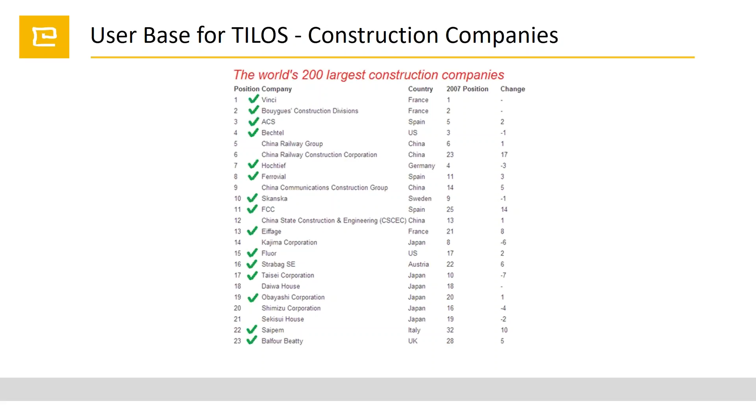As I can see, we have a lot of attendees from India. You have to pay attention that it's also widely used in India by companies such as Ircon, SR, Siemens, Larsen, and so on.

So what are the characteristics of a linear project? Well, the first main characteristic is that all the activities, all the works are performed on the right of way. So we have one axis where all our work should be performed. We can observe them on projects such as pipeline, railway, highway, tunnel, engineering, transmission, and also high-rise building projects. One of the main things to take care of is that we have repetitive works.

Which are going all along the length of the project, and the benefit of using TILOS is that it will help you give exact quantities and optimize productivity rates. Moreover, you'll be able to see your crew movement and avoid clashes, and it will help by reducing the project duration and overall cost.

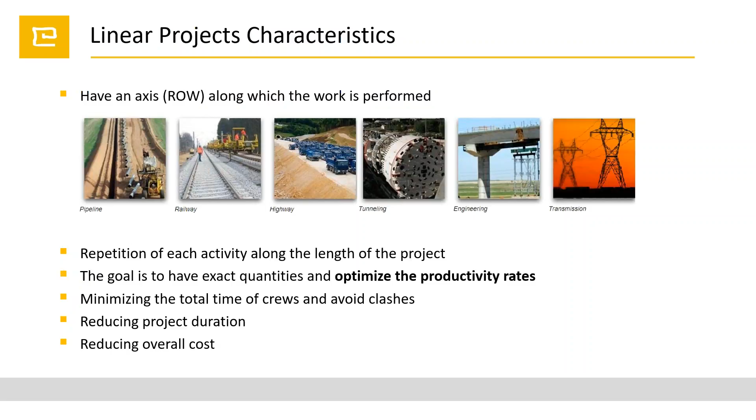So people always ask me at which project stage we can implement TILOS. My answer is that at every stage there is a possibility to use TILOS, whether it's the feasibility studies, the overall plan, the production plan, or special studies. It can be used for pre-designing, planning, procurement, execution, and even for claim analysis.

So it can be used by the owner, engineering companies, the constructor, subcontractors, the general contractor. It doesn't matter, everyone can use TILOS for their purposes.

Here we have some examples of industries where we could implement TILOS. You can see here we have the transmission line project. This is a real project. We would like to show real projects, not just visuals, so that you can see companies actually using TILOS for their needs.

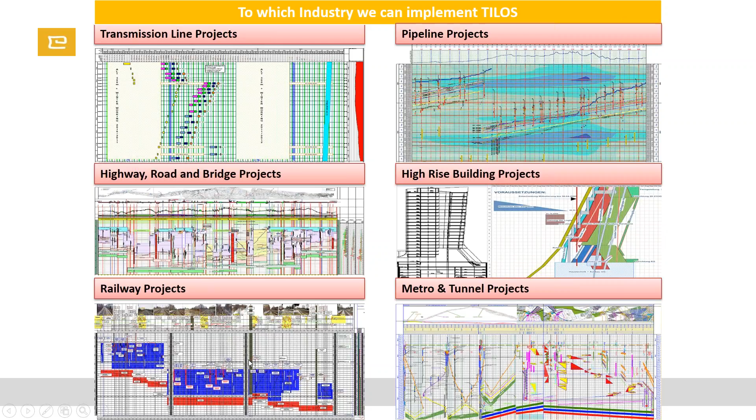So the pipeline project where we had the weather risk - we could estimate the weather risk. Highway, road and bridges project, the high-rise building project where we applied TILOS for the line of balance. The railway project, as you can see, we have railway projects, a lot of them, metro and tunnel projects.

So the main difference between TILOS and the CPM tool is that you can combine your schedule with the information of the project. What I mean is that when you have your traditional CPM, which is based on one axis, the time axis, with TILOS you have a distance axis and a time axis, and you're also able to see information about the project, such as whether it's a river crossing, or a tunnel, or everything. Whatever project information you have, it can be connected to the project plan.

Moreover, instead of having a 40 or 50 page report as a traditional CPM tool provides, you can have everything in one single page. So you can print it in an A0 or any format you would like, and you will be able to follow up with your activities, with the progress, and with your crew movement.

Let me explain the difference between the traditional CPM tool, where we use only the Gantt chart, which we can observe in MS Project or Asta Power Project, where we have only one axis, which is the time. All our work and activities are going according to this.

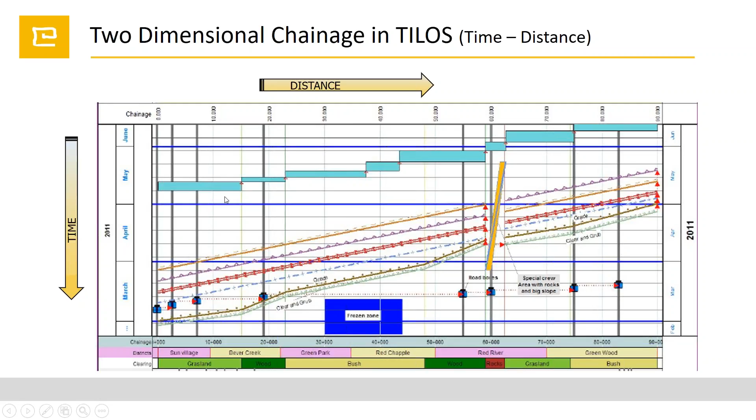There is a possibility to set up sectors or districts, so it's up to you how you would like to define it. This is the main part for you to understand how TILOS works, and during the live demonstration you can easily follow along with what I'm talking about.

So now assume we have a 4-kilometer project. It can be a railway project, a pipeline project, or a road project. We have divided it for each kilometer - the first, second, third, and fourth. Moreover, it's been divided for each 100 meters. You can divide it into each 10 meters, 50 meters, or 500 meters. It's up to you and your wishes how you would like to divide it.

Moreover, the time axis can be easily modified. You can show the year, week numbers, days, months information, or combine everything in one. We can assume we have 3 months to complete the 4-kilometer road project. Moreover, TILOS gives us the ability to connect project data, such as visualization of the project.

First, it is a symbolic representation of the project. Let's say this is our main road, and we have the first intersection, the second intersection, and the culvert or bridge. If you pay attention above, we have the elevation profile, which describes information about our land level, the current land level, and the assumed road level or rail level.

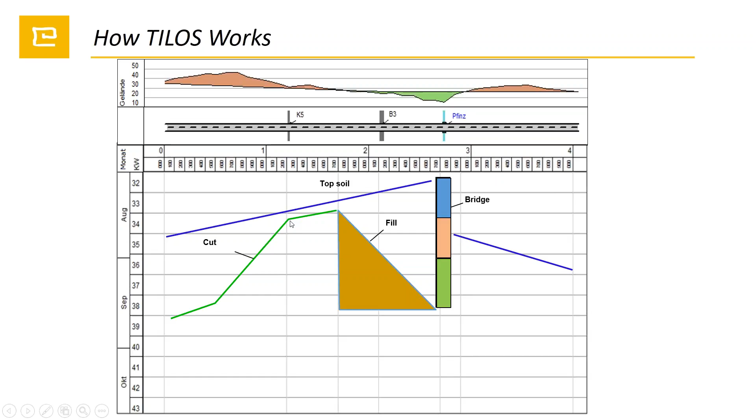Now we're going to the next activities, and you see there is a difference between the topsoil stripping and the cutting or excavation activity. If we pay attention to the excavation activity, we have 2 breakpoints. You'll ask why we have 2 breakpoints. Well, the answer is very simple.

I was mentioning just a few minutes ago that I have my elevation profile above. This is not just a picture, that is actually the background, which is followed up with the data. We are taking the information about the quantity, about the volume to be excavated from our profile data. According to this, you will have detailed information about the duration of your activity.

So this information will provide you, once you can combine your profile information about the volume of the amount that should be excavated or filled, you'll be able to connect it with the task or activity in order to achieve the exact duration of the task.

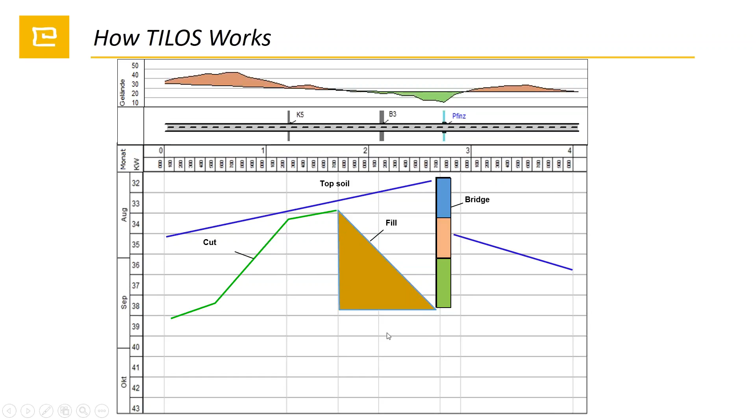Why? Because we cannot perform any activity until we finish our embankment. So it means that we block this area. We cannot perform any work. So first we have to finish our filling or embankment, and then we'll be able to plan, and it goes to the grading and the stabilization, for instance.

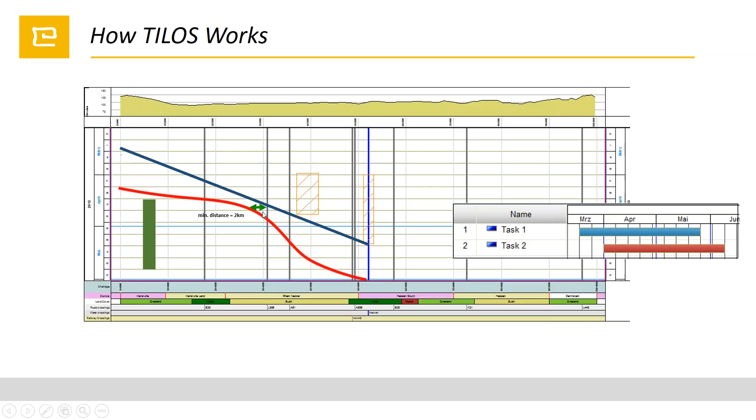Of course you can calculate and assume what the time lag will be, but TILOS gives you the ability to have the distance lag. It means we have just set the distance lag, which is 2 kilometers - these two subcontractors cannot work closer than 2 kilometers. This way, you will be able to have the exact time lag for when my second subcontractor should start, in order not to clash with my first subcontractor. I hope this is clear.

There is a possibility to see the task as a time distance schedule or in a traditional Gantt chart. Once you create tasks on your time schedule, it automatically creates them in a different view, the Gantt chart. There's also a possibility to integrate TILOS with other project management systems - if you're working with Primavera, MS Project, or Asta Power Project, you can easily import and export data between these tools.

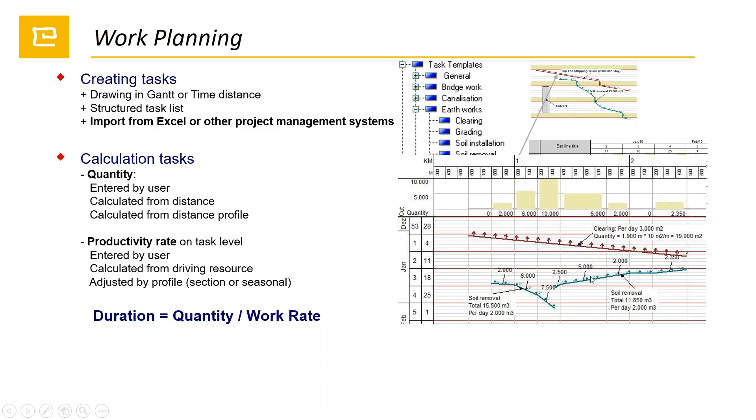For the calculation of tasks, various options are available, whether you'd like to calculate the work rate, the duration, or the quantity. I have my task with annotation information - the name of my task, the productivity rate, the quantity, and you can also define information regarding the distance. So it's possible to display everything in TILOS.

Now moving to the scheduling topic - TILOS supports all possible CPM logic, so all linking types are possible. Moreover, there are additional possibilities to link activities, such as the distance lags I mentioned.

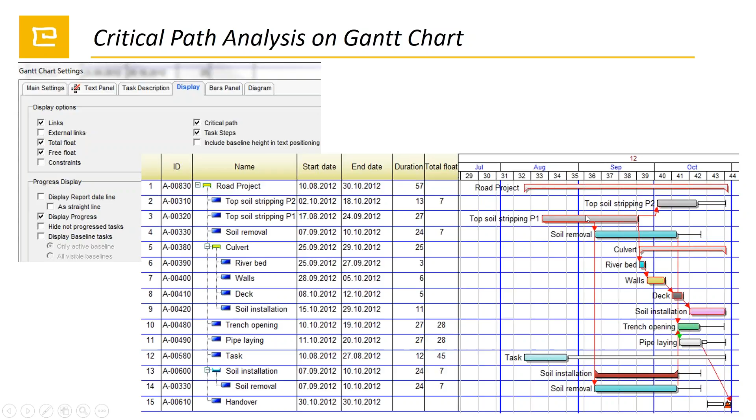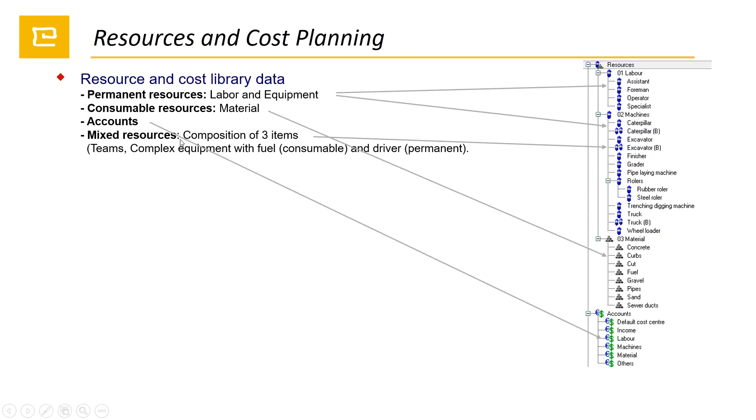As with a traditional CPM, TILOS also has resource and cost planning, such as the possibility to create a permanent resource or consumable resource like materials, or a permanent resource like labor, machines, or equipment. However, there's also the possibility to have a composite or mixed resource. For instance, you might have one subcontractor or one team - this is my Shavkat's team - with one excavator, one assistant, one foreman, or a grader and finisher. So you can have multiple resources as one team.

Also, there's a possibility to show the income. So once we have our cost information and income, we can easily show our cash flow.

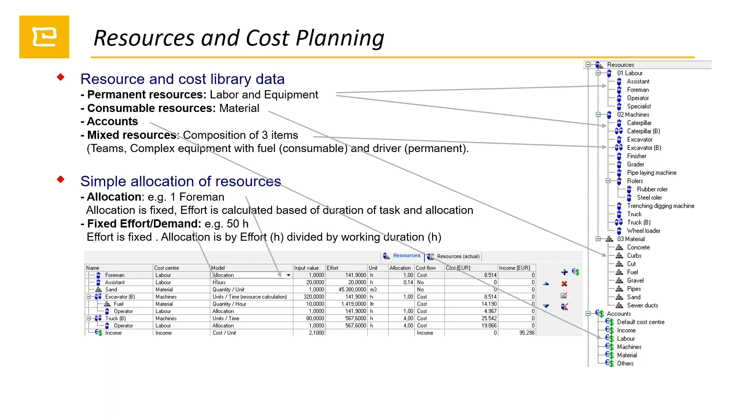Now the analysis - how we can analyze our project or get information about our task or activity is very easy. You can have it on an Excel base, such as a task list, with columns of values and information about your task. However, it's also possible to show on a time distance diagram.

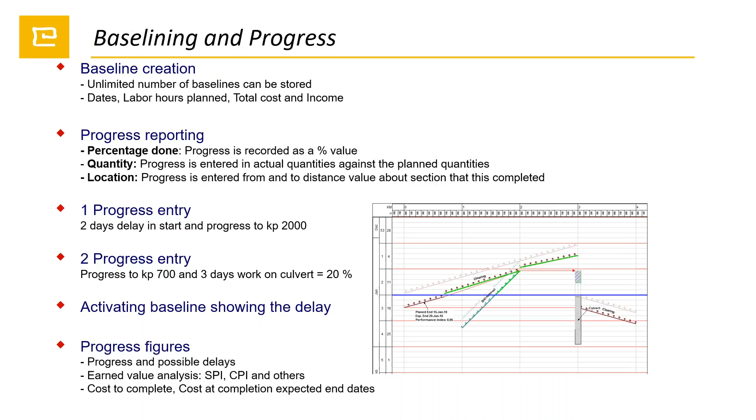Okay, for the project controlling, I know that many people are using Excel, but besides that they are using the traditional time schedule and also Excel for the time distance location. But it takes really a lot of time when you update the project.

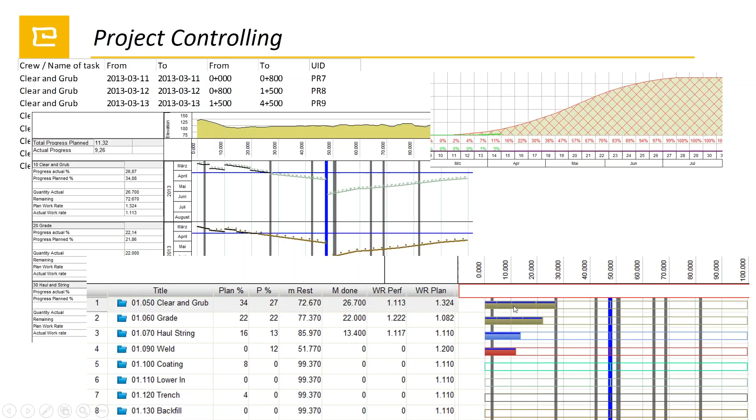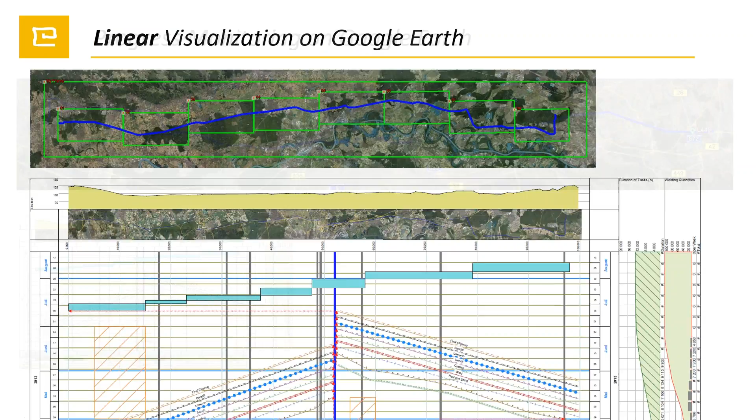The progress monitoring on Google Earth - this is the feature, an add-on called TILOS Progress Map, which gives us the availability to monitor our progress of the project on Google Earth. Assuming that we have our project, so this is our project, and this is our schedule, which we have in TILOS.

I have displayed here the main activities, so it can be the earthworks, for instance, the slip lines, it can be the earthworks and the track works, then the HT lines if you're working on the railway project, and so on. But you can also show it in more detail if you'd like.

Assuming that on Monday, 22nd of April, the highlighted part is where our progress has been done. So this is the place where we did our actual works. You see, we're able to see where it is and how much we still have remaining.

Now on my second data date, let's say one week later, we are able to see our crew movement, or the progress information movement. I'll go back and show once again. You see, our crew has moved, or our progress information moved. Before we were working here, but now we are working right over here.

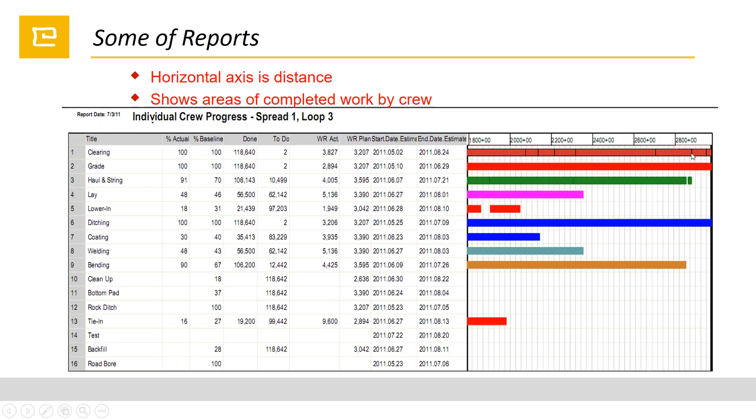Now I was speaking before about the Gantt chart. However, this is a more detailed Gantt chart, but not on the time axis — on a distance axis. So you know where and when you will be able to perform this activity, or your planned information.

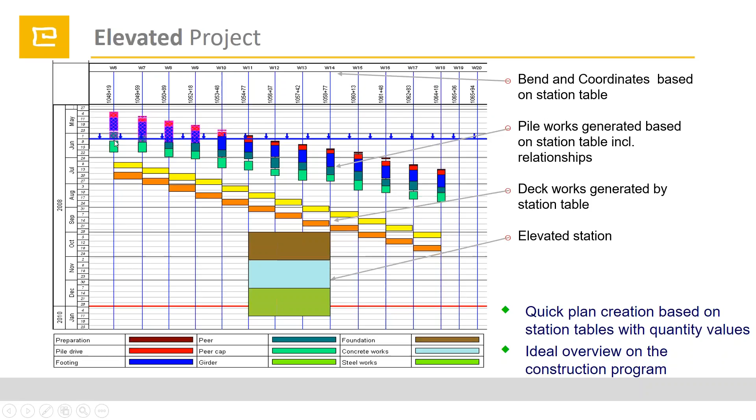So what we can observe and easily analyze from this case is all the information — this blue line is our data date, and all activities above are performed activities, marked with a hatch. So we can say that on this station or this pile, the preparation and pile drive activities have been done, and the footing is completed. We still have the pier and pier cap, and so on.

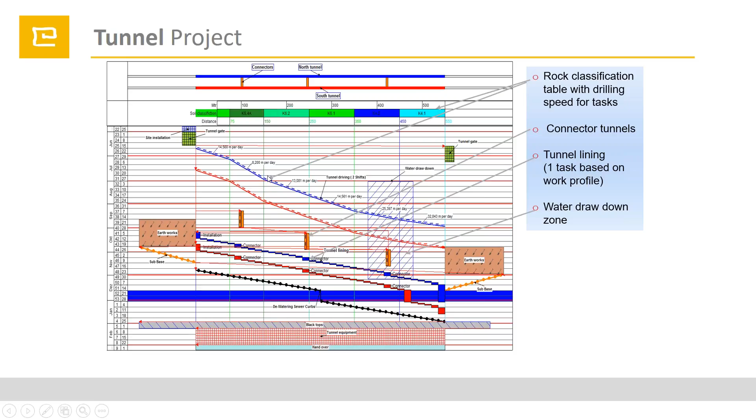TILOS is also being used for tunnel projects, so you are able to define the soil classification. So if you have, for instance, from 75 meters until 150, you will have a different work rate per day or per distance. So you will be able to have the exact duration of your activities.

I mentioned before that TILOS has the possibility of integrating with other CPM tools, also with Excel or just copying via the clipboard. For this exchange we use the XML file format, so if you have your project in MS Project, Asta Power Project, or Primavera, you are able to easily exchange data with TILOS.

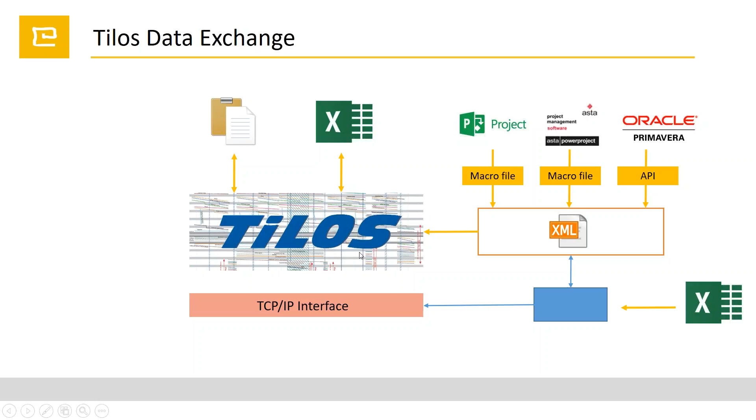Later on I will show how you can exchange data between Primavera and TILOS. In the CPM we don't have information about distance, so what we have to do is give information such as the start location and end location of our activity. Once you have this information, you can easily transfer this data to TILOS.

I will show some of the projects where TILOS is being used, mainly for railway projects. Unfortunately, I cannot show most of them because we have a non-disclosure agreement. However, here are some samples.

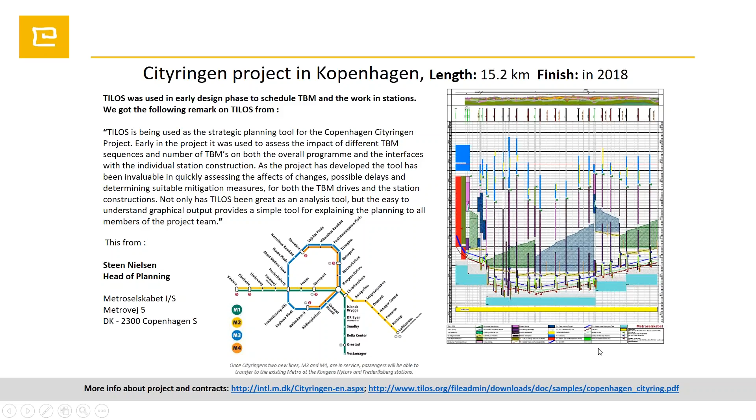This is a Cityringen project in Copenhagen, a 15-kilometer project. You can see the TILOS schedule on the right side.

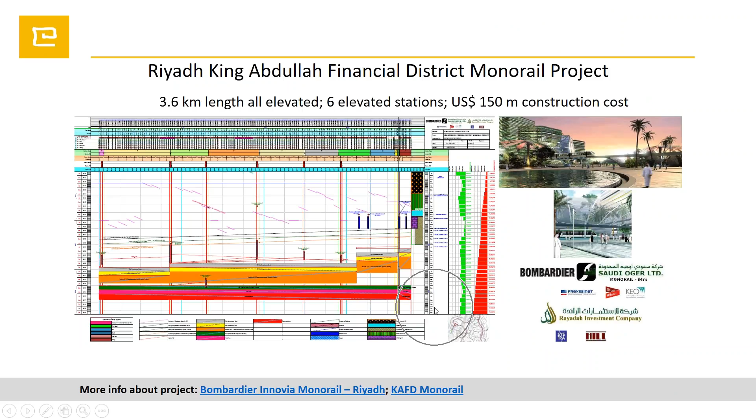Riyadh King Abdullah Financial District Monorail project. You can see that we have our time schedule on the left side. This is a real project where TILOS has been used.

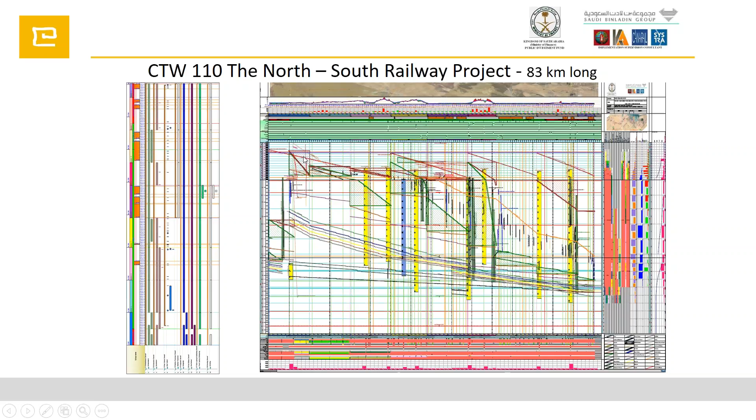If you have any questions regarding the presentation, please ask. If not, I'll be moving to the live demonstration. So for the presentation part, there is no question, so I can move to the live demonstration.

So what I have here is my TILOS. This is the standard view of TILOS. You can see that on the left side I have my TILOS Explorer. As TILOS is a file-based system, all the information regarding the project and the data is stored in one file in the TILOS library. So you can see I have my task list, my Gantt chart view, and my task library.

It can be the resource library - I have multiple resources. TILOS uses templates like other CPM tools, so once you create your template, you can use it later on. For instance, a template can be loaded with resource information, cost information, or task information.

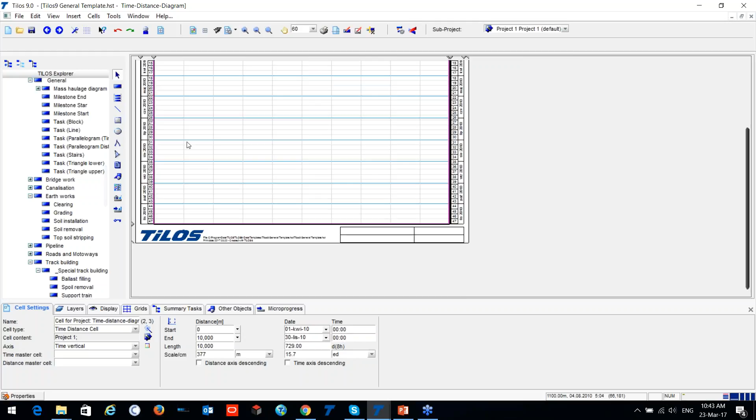Let me first show you how you can easily create your task. Before this, I would like to explain what we can see over here. This is our main area where we will have information about the project and also about our tasks. Assume you have a white paper in front of you and you would like to draw your activity.

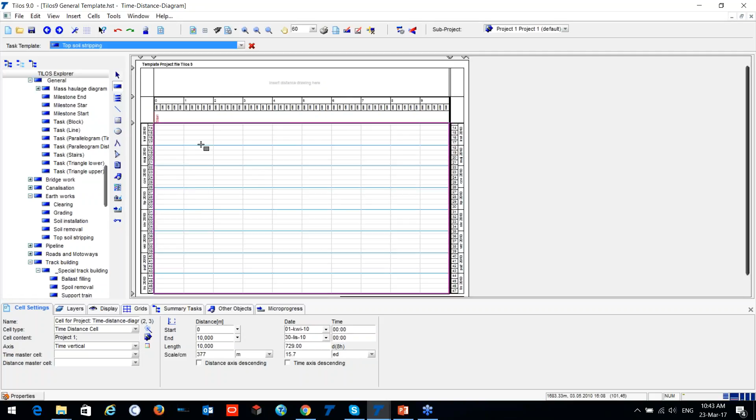So I'll be drawing my activity. I will start with my earthworks, with the topsoil stripping, and I'm drawing my activity. I would like to draw starting from the 9th kilometer until the 1st kilometer. So you see, I just easily drew my activity. But this is not only drawing - this activity has a project management background.

So you have multiple options in order to calculate it, whether you calculate the work rate. I'll give the quantity - for instance, it is 20,000 cubic meters. So you can see that in order for me to complete 20,000 cubic meters in 35 days, what should be my work rate? Here is my work rate: 71.42 cubic meters per hour.

I can ask, okay, 35 days is too much for me, how can I shorten it? So I can say that I would like to finish my activity in 20 days. TILOS automatically calculates what is my planned work rate - so right now it is 125 cubic meters per hour.

I'm able to calculate the duration. For instance, I have my quantity and I can change the information about the work rate. So if I have, for instance, a work rate of 100 cubic meters per hour, what will be my duration? TILOS automatically calculates that my duration is 25 days.

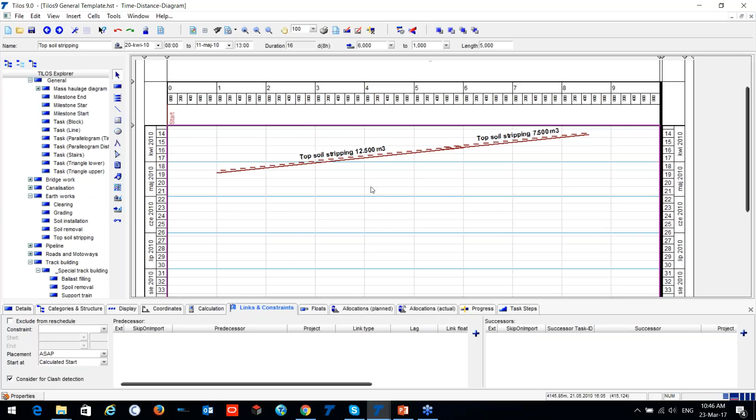TILOS has an option called run clash detection. I'm just clashing and it says there is no clash. Very interesting. Let me just make it a bit over here.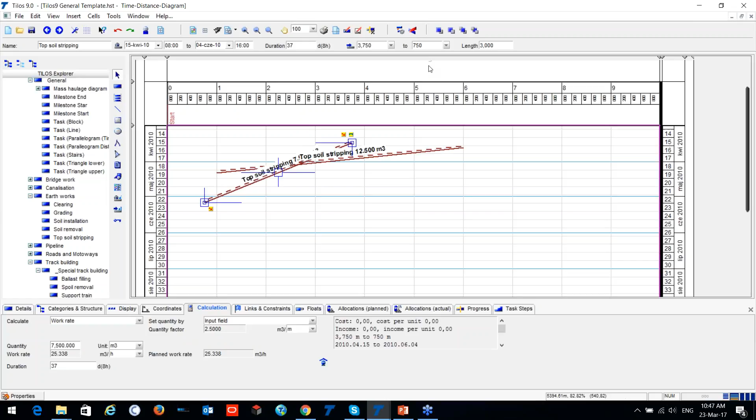Now I will calculate the work rate. Please see, I just ran my clash detection and TILOS gives us a report that we have a clash detected - my activity name, what I have a clash with, the information about the time and distance, and of course more details such as the ID of the activity.

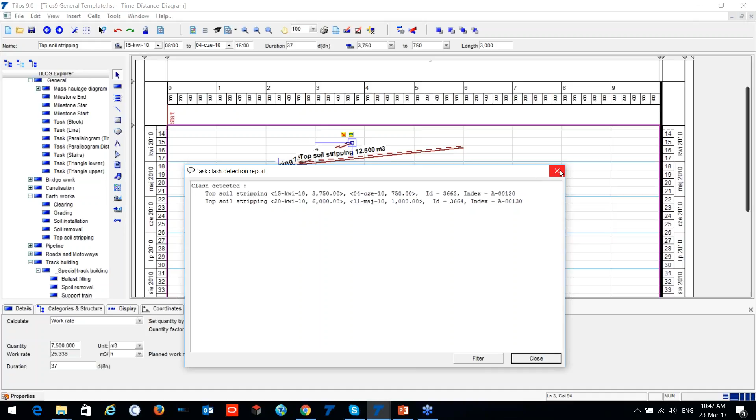So you see, when you're planning on the CPM, you won't be able to see any clash. As an example, I can show you the same thing on my Gantt chart.

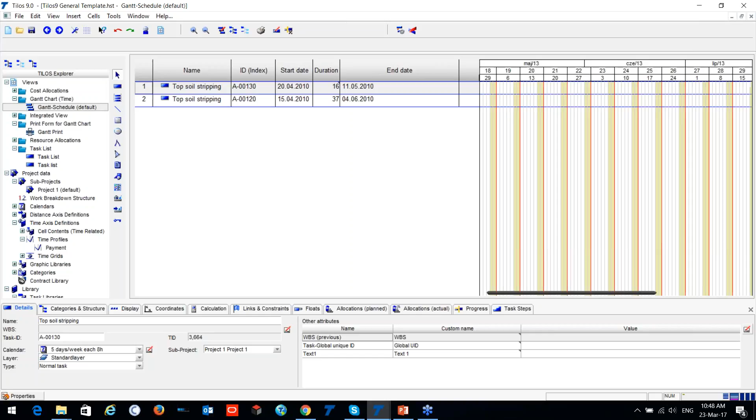Let me just show my Gantt chart. And my activity - so I have my end date under 2010, but right now I'm in 2013. Just a second, I would like to show my view range starting from 2009.

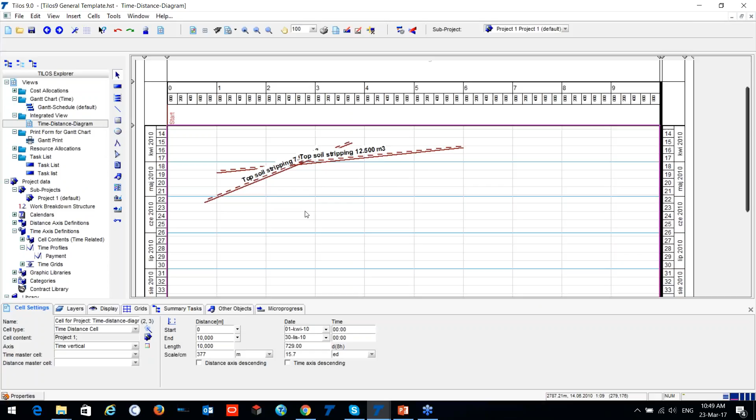So here are my activities, and you can see they have different start and end dates, but we are not able to see any clash. But when we go to the time distance diagram, we can easily see there is a clash on these activities.

All right, I'll show you the example of the project. This is a sample project, what we have here. This is how my project looks like.

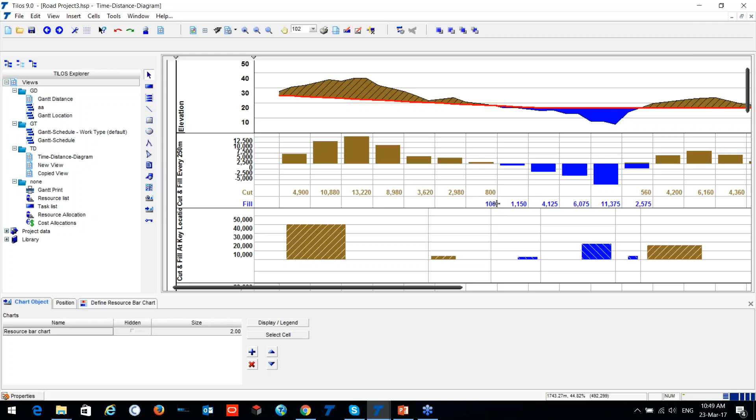Above I have my profile information, the information about cutting and filling every 250 meters. So you can see the volume to be cut every 250 meters, and the amount that should be filled also. Between the sections, there is a possibility to show the amount between the sections.

So you can see during this time period we have the holiday - if I'm not mistaken, yes, this is December. So in Europe we have the Christmas holiday, so that's why we cannot work during this time.

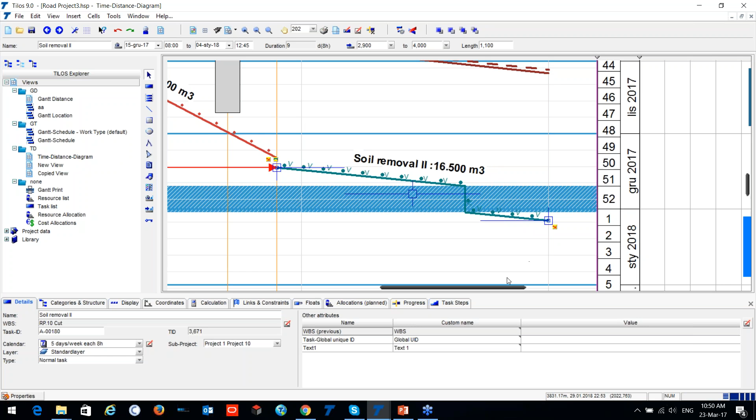For instance, this can easily be observed on this soil removal activity. You can see we started our work in the second week of December, and after 1 week passed, we stopped our work, and later we started right on the next year. So this is the information about the tasks.

I can show you, I was mentioning some reporting options such as quantity. I can display quantity information about my stripping, the pipe, trench, and so on - it can be for the subgrade, the sub-ballast, the excavation, or the embankment as well. Also the information about resources - in which activity and when they are being used.

The working hours, labor hours, machine hours - this is per month. The working days as well, the machine days. The cost information - labor cost, machine cost, material cost, other costs if I have them - and also the cash flow diagram with the S-curve.

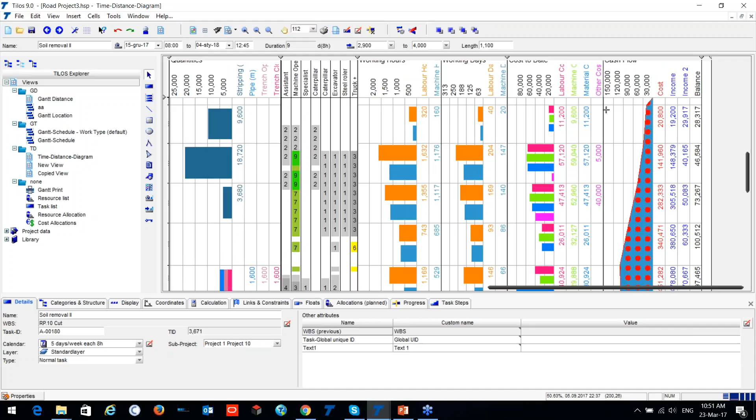So all this information can be editable. As I said, imagine you have a paper right in front of you and you would like to change any information - there is a possibility to change it.

Here what I have is the cost, income, and another income, and also the balance. So this is the reports according to the time axis, but below I have the information reports on my distance axis. So what I have is my district names, district kilometer information, and the resources.

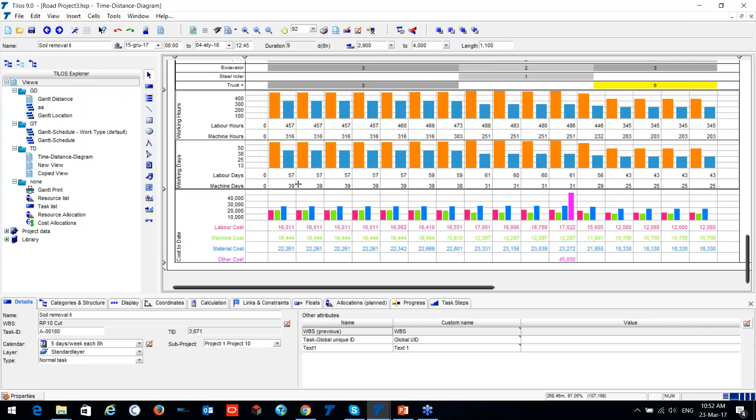This is all information according to the distance. So we know that starting from the first kilometer until the 500 meters, we have 457 labor hours. And also it's possible to show the cost information. Okay, this is the sample project.

Right now I would like to show you the visualization on Google Earth, how we can observe and monitor our progress using Google Earth. For the Google Earth integration, we use the TILOS progress map. This is the add-on for TILOS.

I will just open the project in this case. So what I have here is the information. What you need in order to integrate it is the KMZ data. So most of you, when you run your project, you have your KMZ data and the scheduled data in TILOS. You can show the information about the tasks.

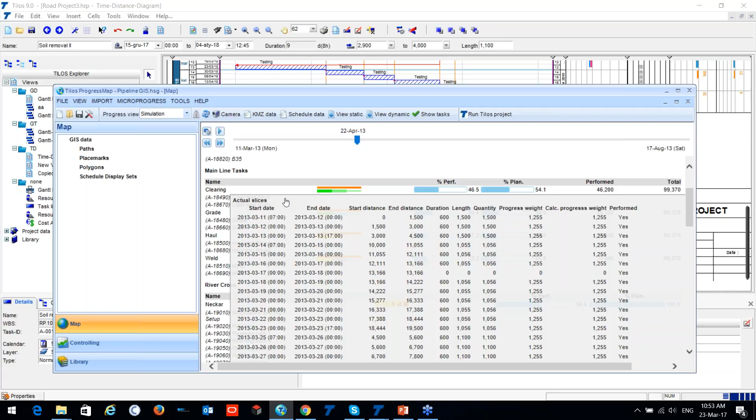So for instance, here we have the engineering object, and here we have our main activities. And also more detailed information about the start, the distance, the duration, length, the quantity, and so on. So how we can actually load it to the program, to Google Earth, in order to see what is our current status of the project.

I'm loading right now my Google Earth. All right, so it's moving, still loading. So now, as you can see, I have this blue line.

Blue line is my right of way, my chainage of work, of my project. The slim lines and the highlighted bars define that slim lines are the activities which should be still performed. However, the highlighted part, we are able to see has already been done.

If I run the simulation, it will give you the information about the planned percentage and the performed percentage. So as my time is moving, you see my time moving right above, you are able to monitor the progress information of my works.

So here we have the structural information, structural engineering object, and you can see that before it was 87% and now it is 100.

Now I'll just move it a bit forward, and you can see that we are almost done with our project.

Or what if I would like to see what will be my status, or what is the status when I would like to see the exact date. Okay, if we have a milestone in order to complete some part of the project, you can easily observe. Like I have a milestone on the 23rd of April, and you will be able to see exactly where I performed my works.

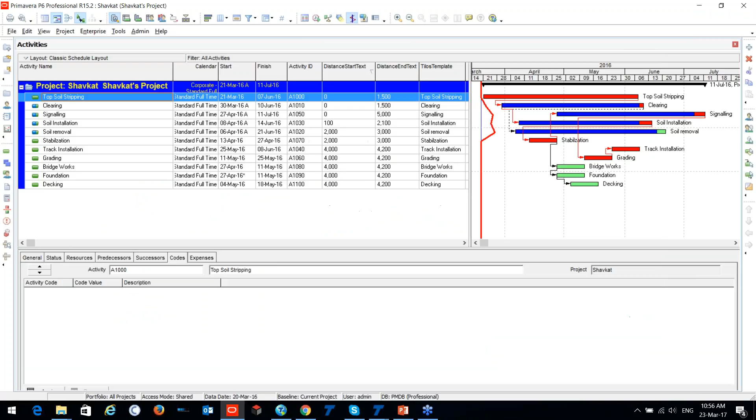Okay, it's still loading. Close this. Okay, so let me open some project.

Okay, so what we have, I have here a simple metro or railway project, let's say. So what information should we include in CPM is the information regarding the distance. So in each activity you have to give the distance between where our activity is starting and where it's going to finish.

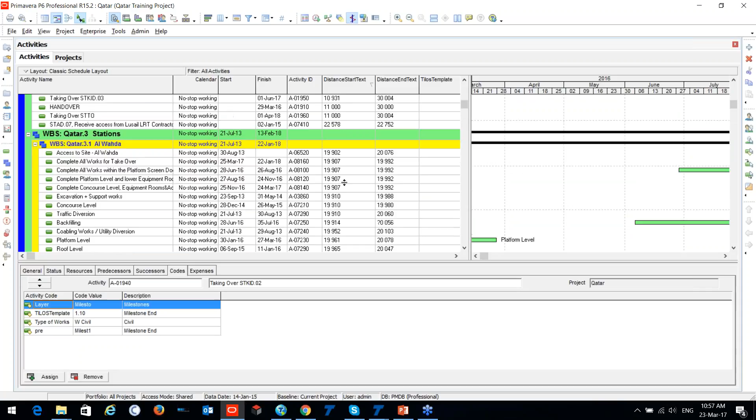So once I have this information in all activities, I can easily transfer this to my TILOS project. What I have to do is export it using the Primavera P6 XML format. So I can just export it. However, I will not take your time - I have already exported this project as XML.

Now I'm going to open my project template in TILOS. I'll delete this activity. So right now you can see that I don't have any task on my TILOS.

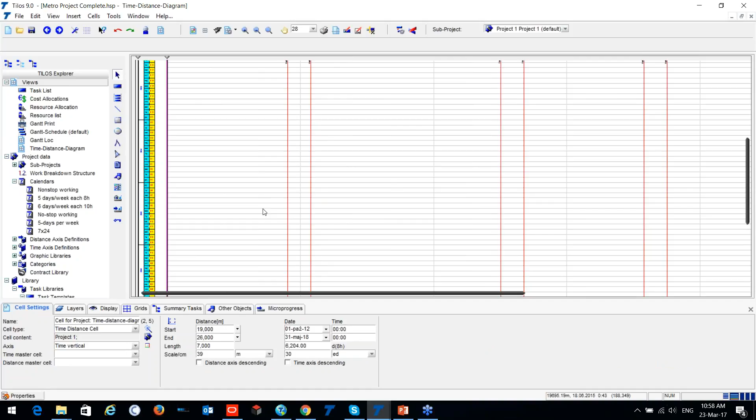I have the information about my profile, about my stations, the kilometers, the sections. Okay, everything I have already prepared. So this is a template which you need to prepare before you plan. What I will be doing is easily importing this XML which I took from Primavera.

Okay, so I'll take this XML. I'm clicking next. Here the important part is which information you would like to import.

So whether you would like to import only the WBS data, the categories, the links, the import, the resource. If your project is resource loaded, you can easily import the cost information.

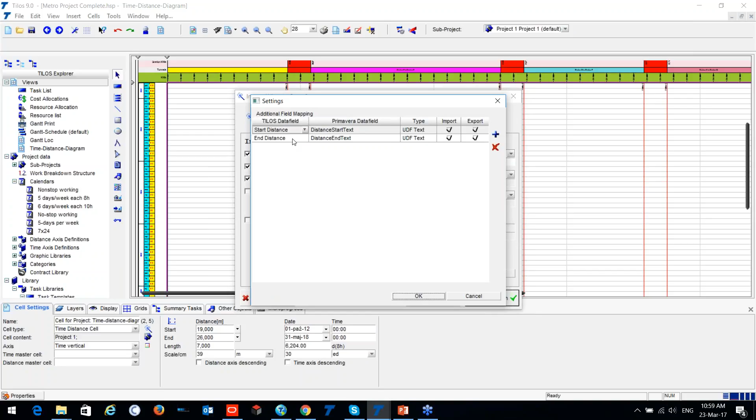But in additional field mapping, we have information about the start distance and end distance. So I'm using the information from TILOS to map with Primavera. In Primavera I have a distance start and distance end, so I need to map this to the information on my TILOS project.

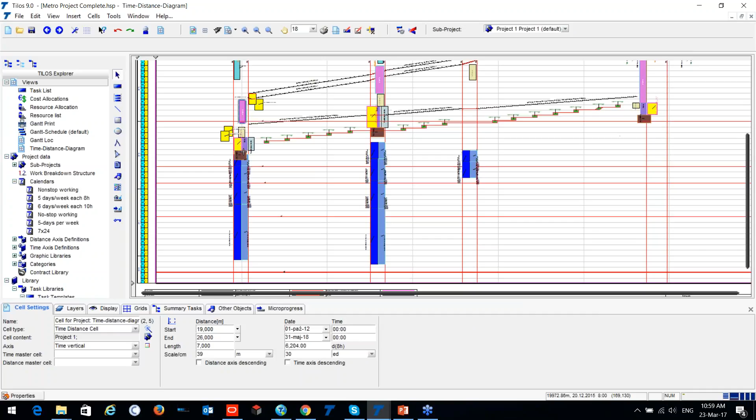Once I click finish, TILOS automatically imports your project. All your activities are now imported, so you can see where is my station, which works are going to be done, and the sequence of our activities.

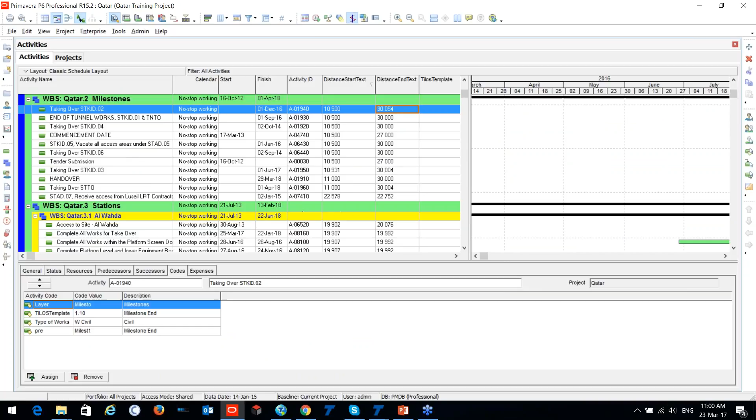So how it's better to see your project, whether in a time distance schedule or in Primavera, it's up to you. You can use both tools. For instance, you can use TILOS, you can use Primavera as a main. If you've been contracted to use Primavera, you can use it in Primavera, but for your own reporting to the management, you can use TILOS, for instance.

So once you have imported into TILOS, here you have information about all the activities in a traditional time distance diagram, and you can see it in a Gantt chart. So you have all the activities right below in the Gantt chart, or you can see it as a normal task list.

So you can use the filter. There are multiple filter options. You can filter your own activities. For instance, I have just filtered platform one, so this is my filtered activity. Or you can use the filter in order to display only the engineering objects or only linear objects.

Another example I would like to show you is the progress. So if we were going to work with multiple subcontractors, you can easily use this example for the claim. TILOS will help you with the claim analysis.

Let's assume we have some work which should be done - for instance, 500,000 cubic meters of excavation. And we planned our productivity rate as 520 cubic meters per day.

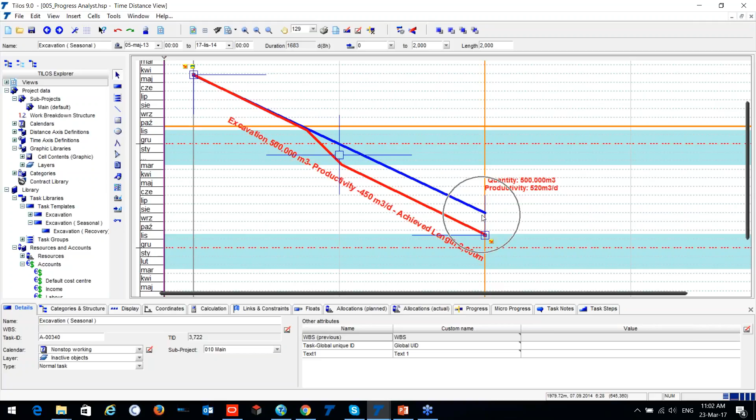But when we enter the winter period, my productivity rate changes. When I entered my winter period, my productivity rate changed from 520 cubic meters per day to 450. So when I finish my work, I can assume I will be delayed by 2 or 2.5 months. So what we can do to prevent this, we can plan our work with the information of the recovery.

For instance, I can increase my work rate at the beginning, before we reach the winter period. Let me make this more visible for you. My productivity rate until I reach the winter period is 600 cubic meters per day. So I know I will drop down when I reach the winter period - you see my productivity rate is going to drop.

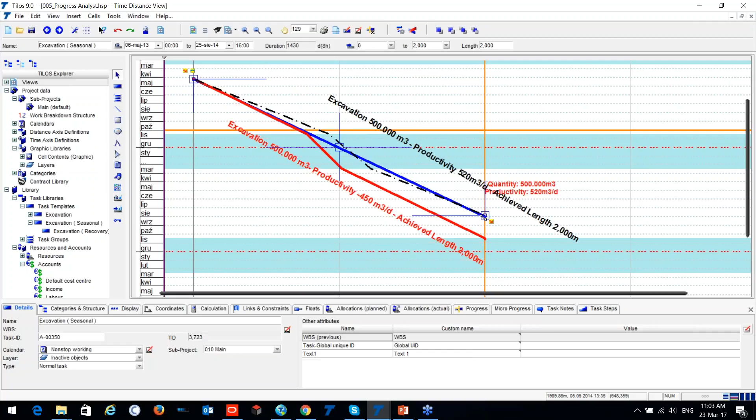However, when I reach the end, I can see that because I increased my productivity rate at the beginning, I drop down in the winter period but can easily catch my baseline. So you can perform here the what-if analysis as well.

Okay, another example with the progress. Let's say I have the same task, the same productivity information, same quantity information, and now I will be entering the progress.

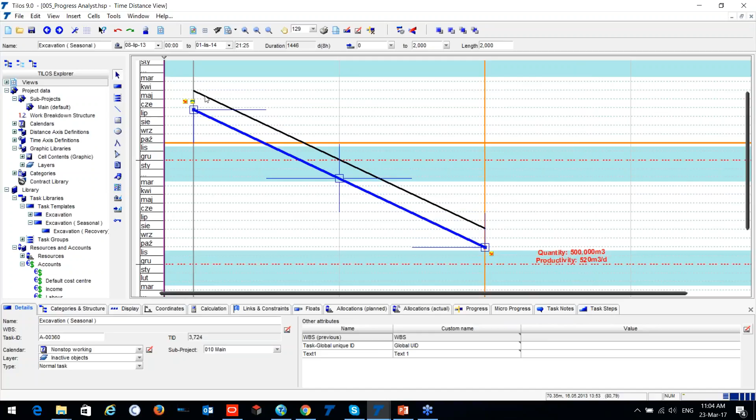So what we need to do is first I will take my baseline. An unlimited number of baselines can be created. So pay attention, this is my baseline task, the black line, and now I'm entering the progress.

It can be the subcontractor, for instance. Assume this task as a subcontractor. They have work to be done, and I'm entering the progress, so I will enter the progress.

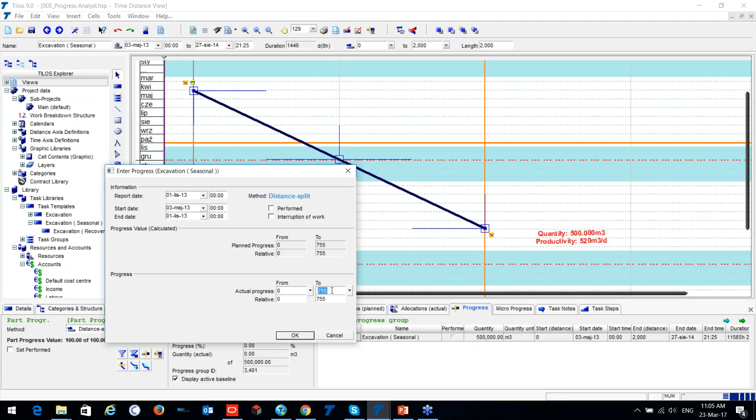Until my data date, which is right over here, the orange line, the subcontractor was supposed to reach 755 meters, but my actual information is that my subcontractor reached only 500 meters.

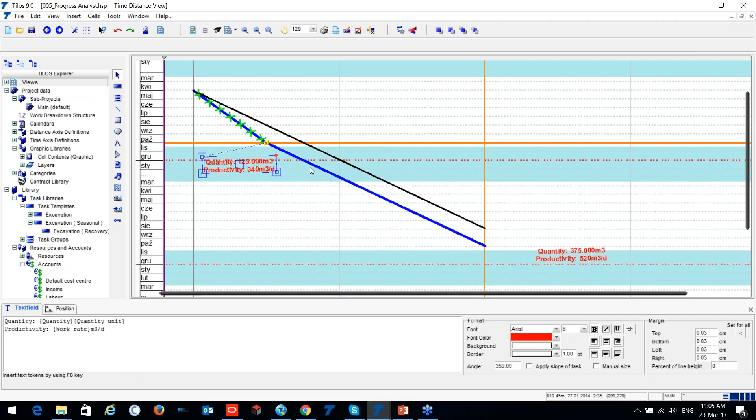I'm pressing OK and rescheduling it. You can see the crossed part is my progress part, and you can assume that my subcontractor, instead of working 520 cubic meters per day, only worked 340 cubic meters per day.

So by this information, the plan can change. If my subcontractor returns to the planned work rate of 520 cubic meters per day, we will finish with a delay of 2 months. So we can have different scenarios.

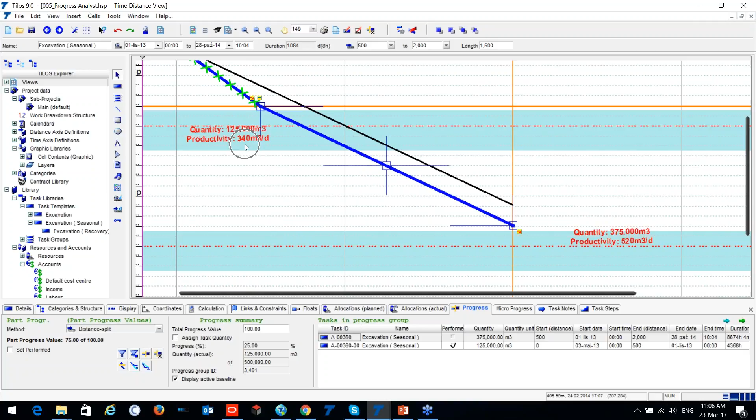For instance, we are assuming that my subcontractor will not increase productivity and will still be working at 340 cubic meters per day. So what will be the expected end date?

By clicking one button, I can see the line has changed, and if my subcontractor works at 340 cubic meters per day, my expected end date will be right over here, in 2015.

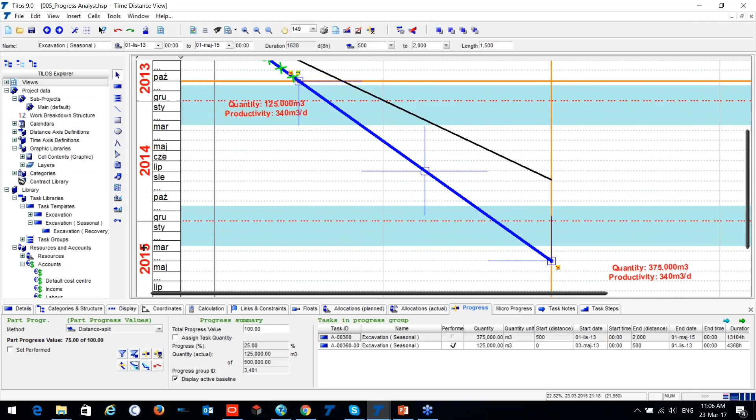We're supposed to finish it at the end of summer 2014. However, if my subcontractor does not increase their productivity rate, we'll finish in May 2015, so a 6 month delay. This is not acceptable at all.

What can we do in this case? We can tell our subcontractor they have to increase their work rate to reach the baseline end date. The subcontractor will ask how much, or say they will increase but won't at the end. But you can say they have to increase their work rate to 520 cubic meters per day in order to reach the planned end date.

Is it clear? So with options such as calculate expected and recovery line, you'll be able to control your subcontractor.

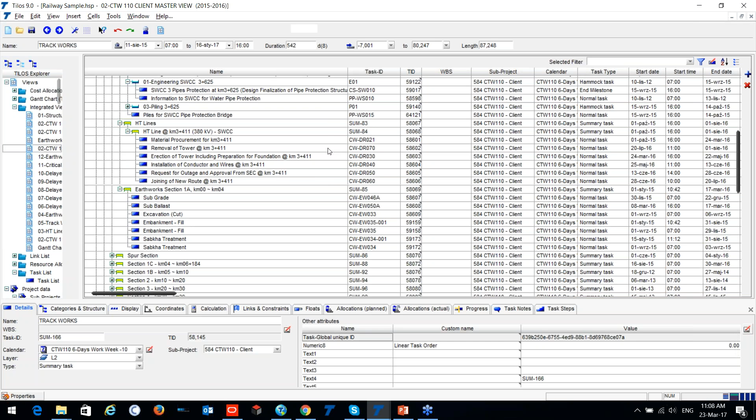Another example I'd like to show you is a railway project. We have here our standard WBS structure. If we go to the master view, you'll be able to see, just a second, it's still loading. This is my railway project, an 80 kilometer railway project. I have information about sections, engineering objects, tasks, and linear activities.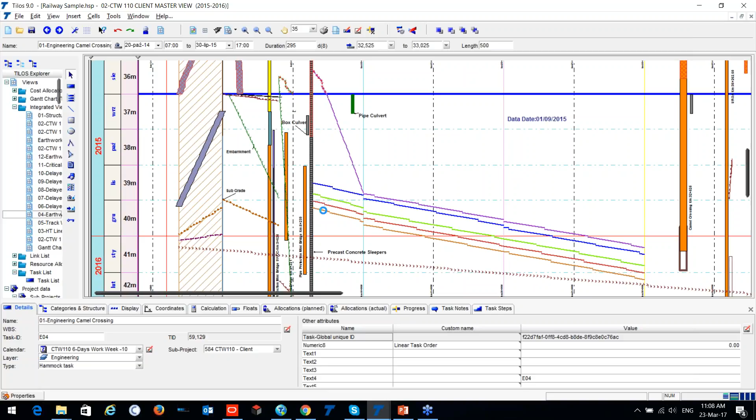So what we can do is have the dashboard. I'll show you the dashboard reporting, how we can actually control our work. Assume that we have our work, this is our excavation.

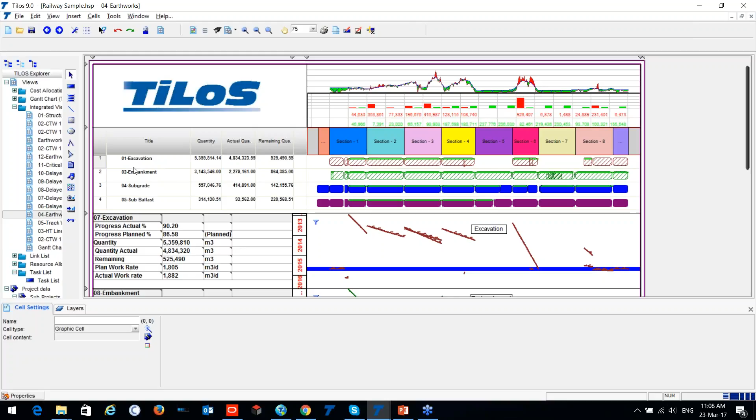We have 4 main activities which we need to track: first excavation, the embankment, subgrade, and sub-ballast. Later on you can add the track works as well, and if you have high voltage, you'll have that information too. So you have the quantity, the actual quantity, the remaining, and where it's been done in which sections.

You can see that the beginning of section 1 is still not progressed, so we did not perform any works there. However, starting from the middle of the first section, we have performed our activities. You have information about the excavation progress, actual, planned, quantity, planned, actual, remaining, and also the work rate.

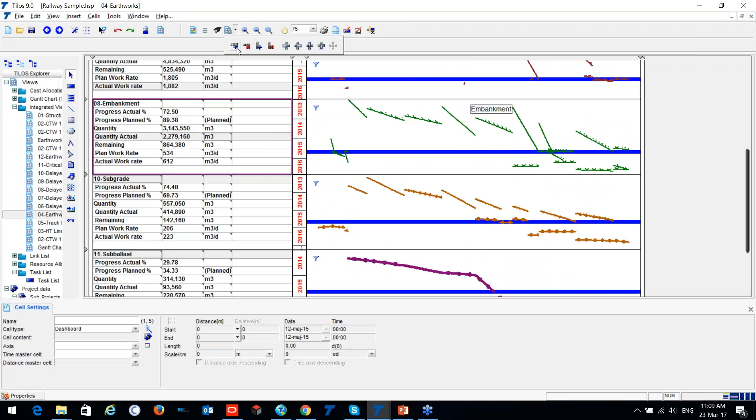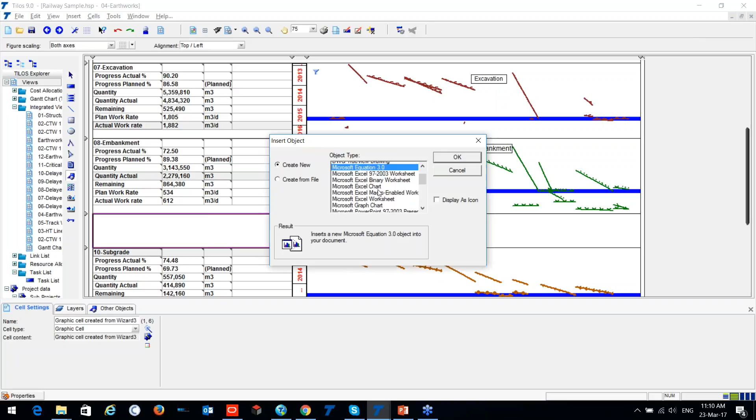So these are the possibilities to create in TILOS, such as dashboard reporting. Multiple views are also available, so you can add any view easily, and change it, for instance, to a graphic cell and input any information, such as an OLE object. If you'd like to input some drawings it's possible, or if you'd like to input an Acrobat file, it's also possible, and so on.

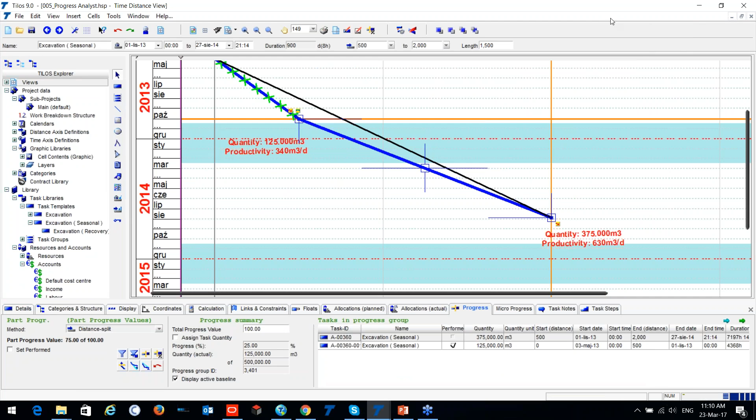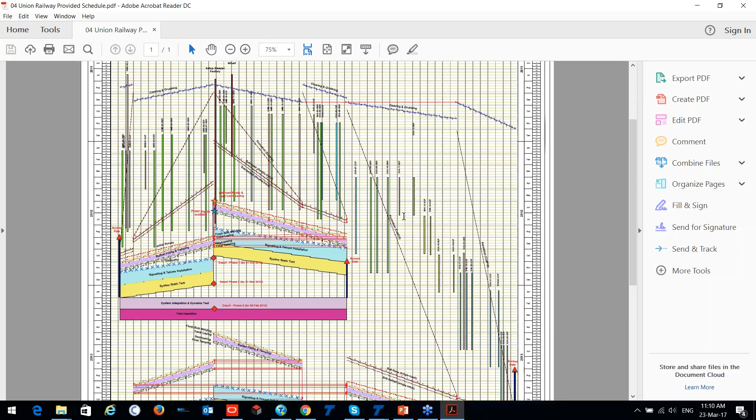Before we get to your questions, let me show you some samples of railway projects we've worked on. This is the Union Railway project. You can see our activities, the linear activities and also the structural activities. All of this was planned in TILOS, and this is the report, showing the information about the legend. It's a simple project.

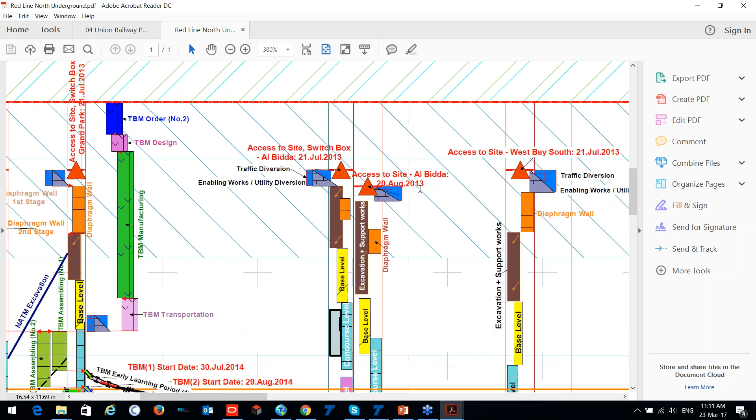I'll show you the red line. This is a project in Qatar. We have information about the profile, the stations, and the works itself. You can see they wanted to see each activity, its name, its start and end, and so on. This is how the TILOS report works.

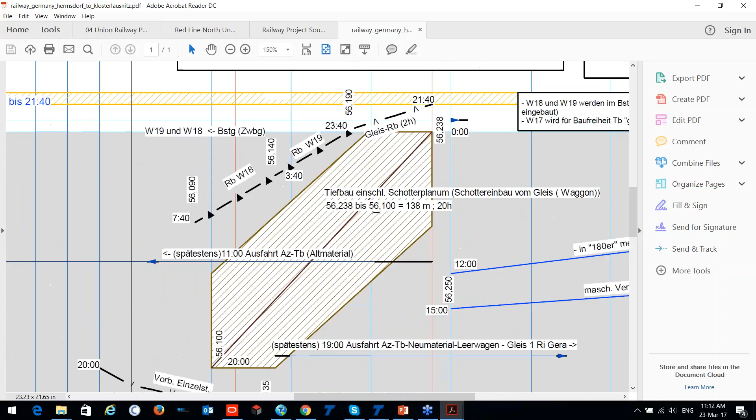We have a lot of other examples of railway projects, however, as I mentioned before, we have a non-disclosure agreement, so I cannot show you those. We also have a railway project in Germany. Everything is written in German, so sorry, I don't speak German, but as an example I can show you their project. Do you have any questions?

Okay, we have a question from Ahmed Makram: Can a planning team work in TILOS on one project at the same time?

Unfortunately, the enterprise mode is not available in TILOS. However, there is a workaround: you can divide your project among the planning team. The first team works on this section, the second team works on a different section, and then you can combine them into one TILOS data file.

Mr. Taimur Ali asked the question, how can you improvise an EPC schedule in TILOS? Well, it can be done in a different way.

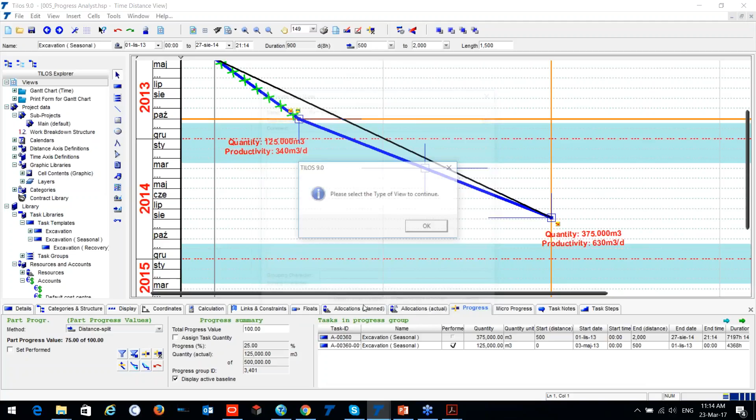For instance, you can create different views. Let's say I create one view and call it the main project. Just a second. This is the main project. Then I would like to create a new view and call it part one. Creating a different view, and I'll create another view called part two.

So now, please pay attention, on the TILOS Explorer I have different parts. This can be integrated into one project, or it can be a separate project itself. At the end, you will have your main project where you will have all your activities.

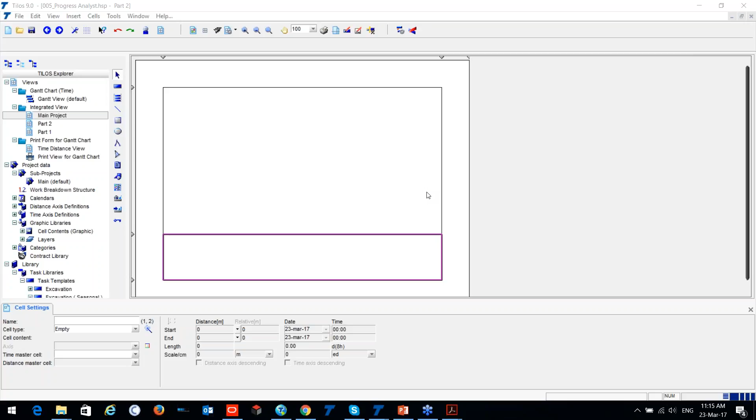Mr. Jural Makwana asked whether it offers two-way interoperability with other PM software. Yes, you can import and export between TILOS and other CPM tools, and vice versa. As you can see, we have options such as import and export, whether from Primavera, Excel, MS Project, or Asta Powerproject, and it works the same way both sides. For instance, exporting works the same for Primavera, MS Project, or Excel too.

Any other questions? All right, so thank you very much.

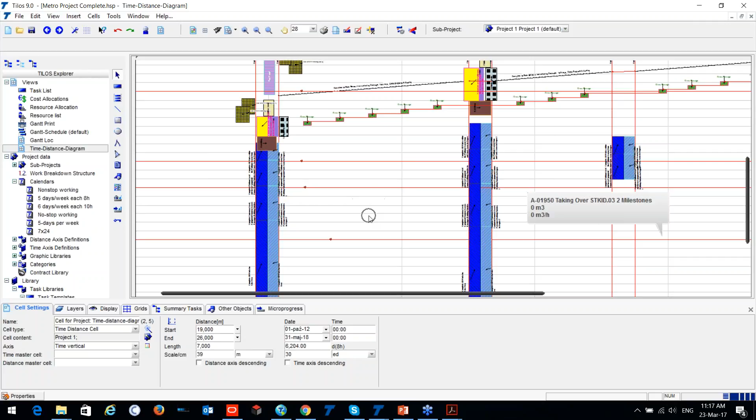We have a question from Mr. Arshad, sorry for that, whether there's a possibility to analyze the actuals of other deliverables which are not measured in terms of linear meters or location. Yes, of course you can analyze it, and there's a possibility to display them as histograms, so you don't need to have it on meters or location. For instance, as I was showing you in these examples, we have information about resources and cost, but this is not according to location.